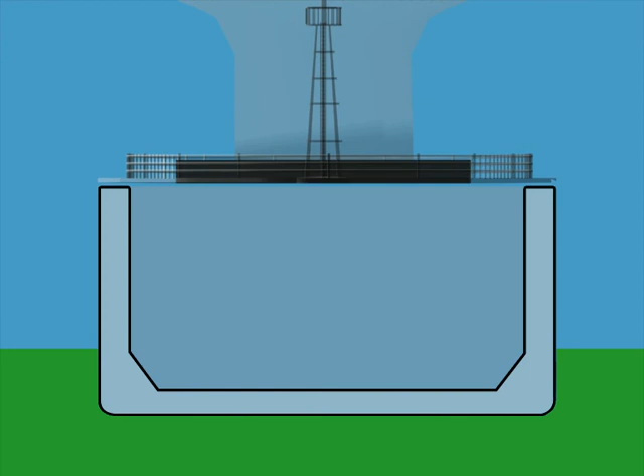Here's how it works. In natural water, aquatic organisms survive on the small amount of oxygen dissolved from the atmosphere. This dissolved oxygen is in equilibrium with the large amount of oxygen in the air.

Venturi oxygen stripping mixes natural water, as it's drawn into the ship as ballast, with a low oxygen gas. This low oxygen gas strips the dissolved oxygen out of the water. By the time that mixture gets to the ballast tanks, a new low oxygen equilibrium is established between the low oxygen gas and the water. Here's how that happens.

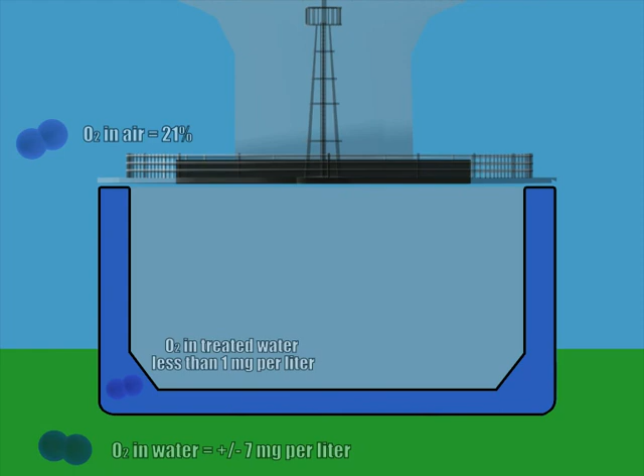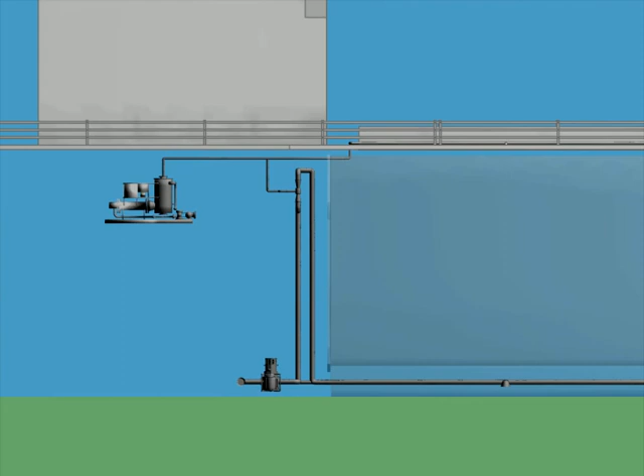The source of this oxygen stripping gas is an efficient high-temperature burner called the stripping gas generator. The VOSS process starts with this component. After the stripping gas generator is turned on, when the gas oxygen level is low enough, the gas is directed to the Venturi injectors. A signal relay then turns on the ballast pumps.

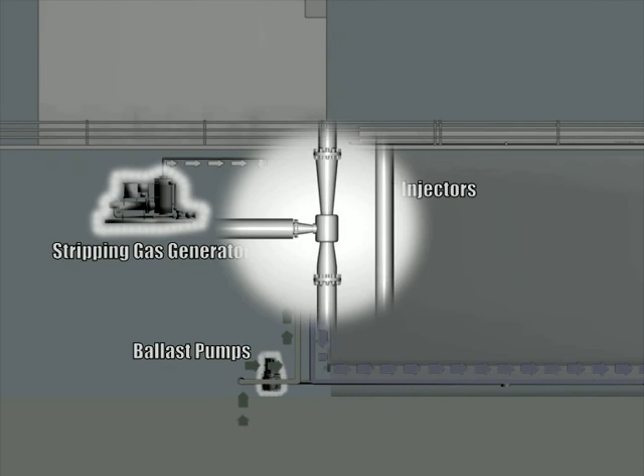As ballast water passes through the Venturi injectors, the gas is mixed into the water. Cavitation mixing shears the gas into a microfine bubble emulsion within the water.

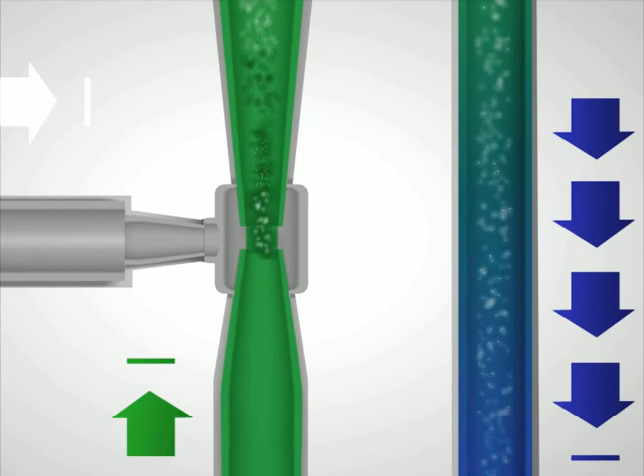Seconds ago, this water was exposed to air. Now, inside the ballast piping downstream of the Venturi injectors, the water is exposed to a gas with 95% lower oxygen than air.

Now, as low oxygen gas bubbles pass through the water piping, dissolved oxygen in the water diffuses from the water phase into the gas phase, as a new equilibrium is established with 95% lower dissolved oxygen in the water. The gas strips oxygen out of the water. At the same time, a small amount of carbon dioxide and nitrogen gas pass from the gas phase into the liquid phase.

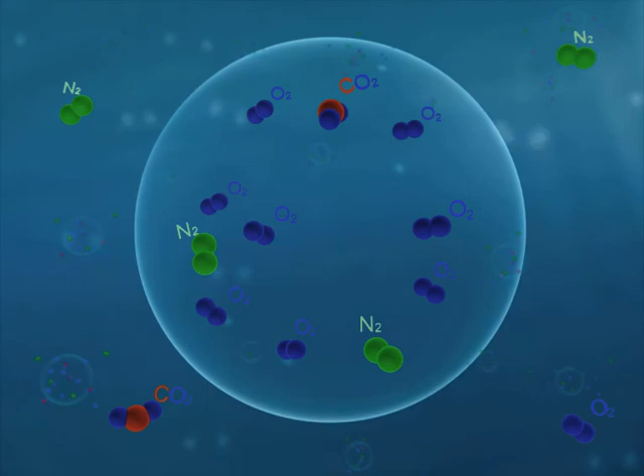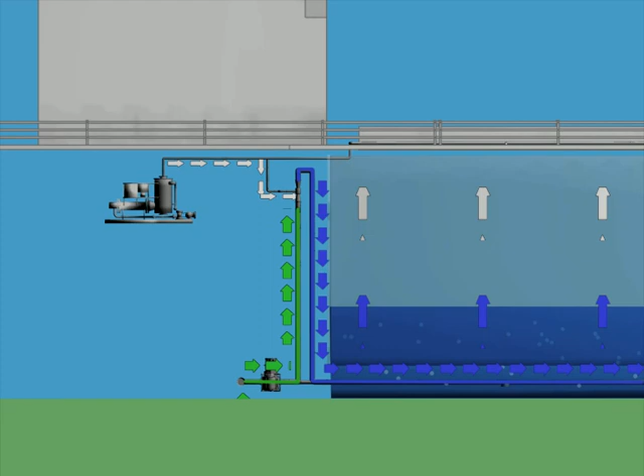Organisms cannot survive the ballast water conditions created by the Venturi oxygen stripping system. Independent shipboard testing has shown that ballast water treated with the VOSS system consistently meets the discharge standards of the International Maritime Organization for all regulated organisms.

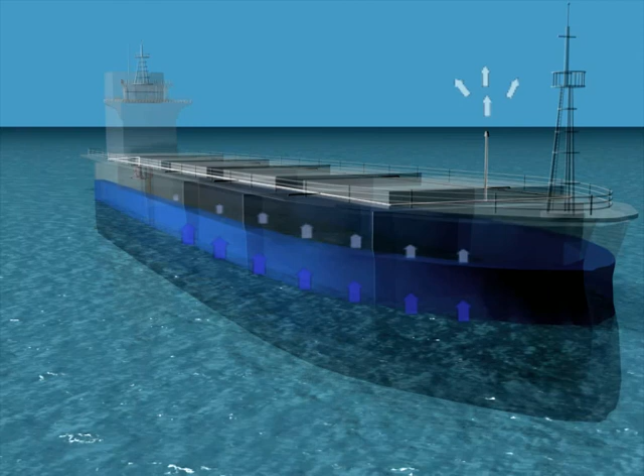In the ballast tanks, gas bubbles rise to the surface and gas is vented above the deck.

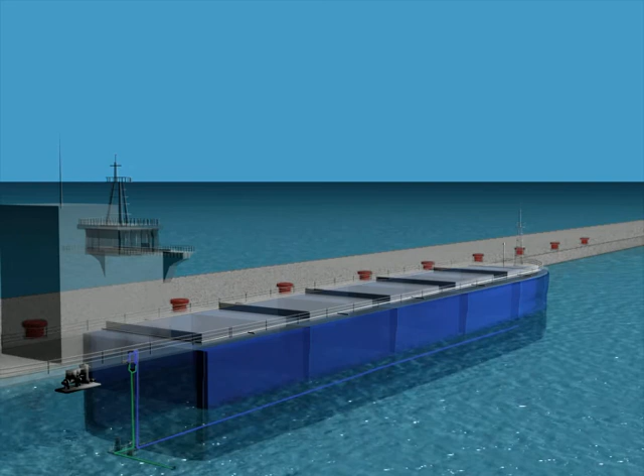As ballast water is discharged, it's passed back through the Venturi injectors again to re-aerate prior to release back into the environment. Simultaneously, as ballast tanks are emptied, the low oxygen gas is introduced to permanently maintain a low oxygen condition in the ballast tanks.

There is another important benefit to this element of the VOS treatment. Permanently inerting ballast tanks has been shown to virtually eliminate corrosion. A humid, aerated ballast tank is one of the most corrosive environments on Earth. Damage to ballast tank coatings and steel can cost millions of dollars to repair.

And in the end, the life of a ship is often determined by the life of the ballast tanks. But by maintaining a low oxygen environment in ballast tanks, the VOS system can significantly extend coating life and reduce corrosion by up to 85%.

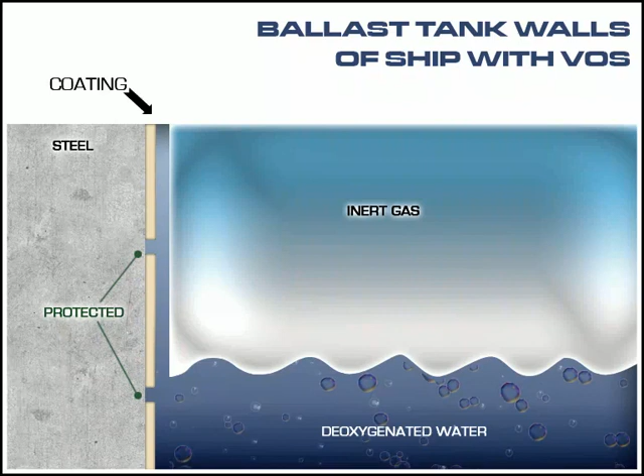This corrosion protective feature of the VOS system can significantly reduce ballast tank maintenance costs and reduce the life cycle cost of the ship. Also, when installed aboard double-hull oil tankers, the system provides a permanent explosion safety protection.

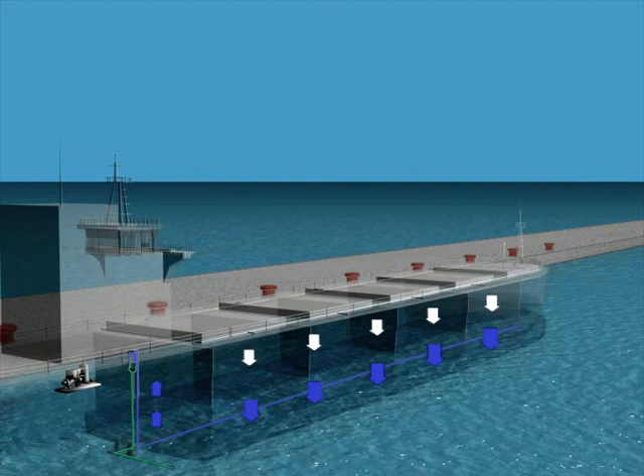When the ship arrives back in port to unload its cargo, the cycle repeats. This two-stage treatment system provides a unique dual benefit of ballast water treatment to protect the environment and ballast tank protection to reduce life cycle costs.

The VOS system is based on a characteristic of water physics known as Henry's Law. It is a physical process and is unaffected by water chemistry, particulate matter, temperature, or salinity. This means it works predictably and reliably in clean water and dirty water, fresh water and seawater, hot water and cold, any time of day, any season, anywhere in the world.